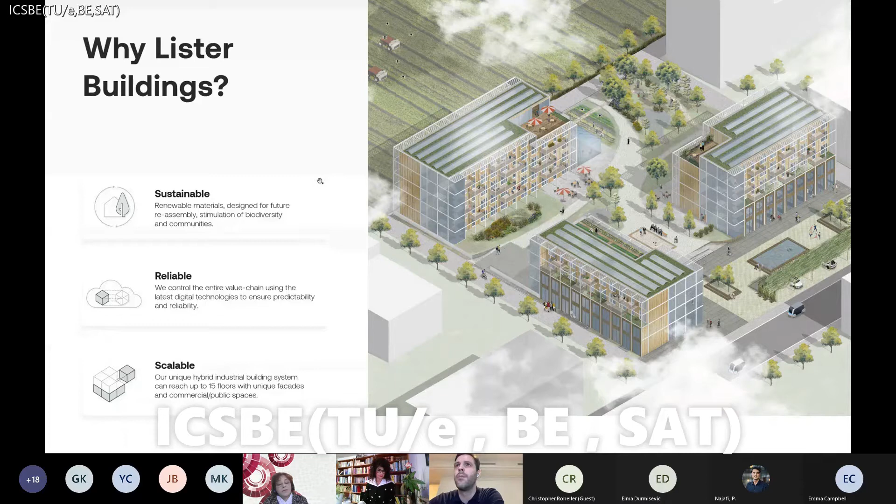We are part of the Kubox Group, a family-owned business, quite old already, roughly 30 years, founded by my father. And we focus on multiple business units, some private equity, hospitality, leisure, R&D, light industrial, real estate, logistics, and hotels. And we do that in the Netherlands and Germany.

And 2 years ago, we founded Lister Buildings, most of all because we saw a growing demand for sustainable housing and housing in itself.

And that brings me to the most important challenges. So we see there's a direct need of 845,000 houses until 2030, but a limited construction capacity. Well, there's going to be some future changes in carbon emitting and towards the circular economy. And we have a growing need to stimulate biodiversity as well. So there's a lot of things changing on the climate perspective.

And we have quite an inefficient industry at the moment. On average, 20% of projects run over time and 80% over budget. So that sums up to: we need to build more houses that positively contribute to our climate, and a faster and more reliable construction process.

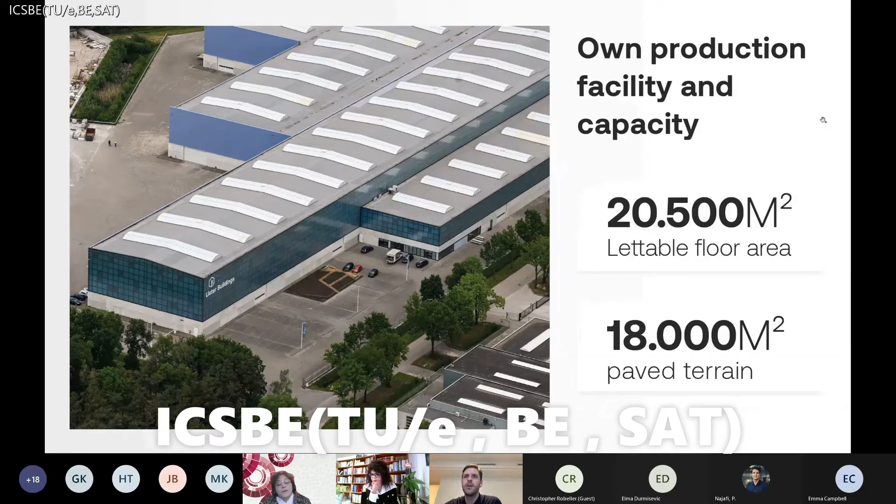We have our own production facility in Weert, 20,500 lettable square meters of lettable floor area, and a large terrain outside as well, 18,000 square meters. Here are a few pictures of the facility.

We created our own tiny forest in collaboration with the IVN, a Dutch foundation focused on nature education and bringing back biodiversity within cities. So we sacrificed a few parking spots in order to grow our own little forest next to the production facility.

We have quite the ambition. So for next year, we have 3 projects in the making. We'll start construction probably before summer. And by end of the year, we should have delivered our first 50 apartments distributed over 3 projects. In 2022 and 2023, we have roughly 900 apartments in the pipeline, and we're aiming for 1,000 apartments annual volume after 2024 and onwards, obviously.

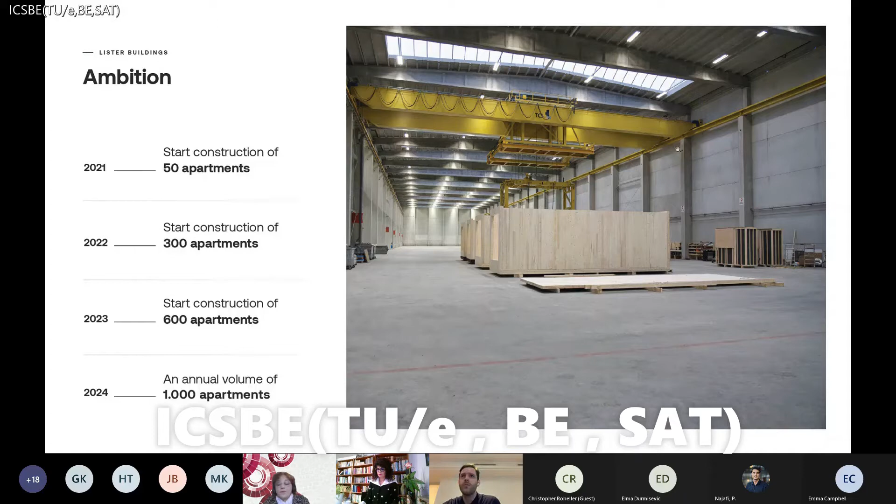Well, first a little bit more about our Lister platform. We're trying to act and operate as one platform and become one solution for the complete life cycle of residential real estate. We aim for complete integration and digitalization of the entire real estate value chain, from design to development and from production to property management.

Schematically, I think it looks like this for our Lister platform, because we see that at the moment, every project is uniquely approached with unique team members, and every time, every project is approached with new team members and with different systematics and different requirements.

We're trying to come up with a system where everyone works closely together over a sustained period of time. So we are really focusing on gaining productivity within the complete value chain of real estate, because 70% of the productivity is lost by sharing and working with the wrong information and lost information within this mess of stakeholders, the big amount of stakeholders involved in the whole process.

Our current partners, brief overview. Most important, I think, CPZ, Pieters Bouwtechniek, and also CLTS and Stora Enso. Stora Enso and CLTS are working closely together in the Belgium and Dutch market, providing and supplying mass timber solutions, entire solutions from design to on-site assembly, and obviously the TUE, which we're currently helping assist in the research to circular buildings.

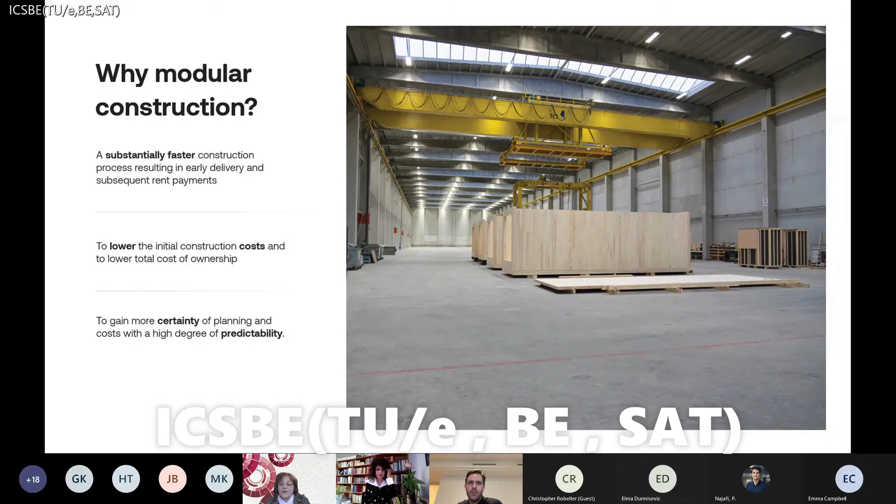So why modular construction? We see a substantially faster way of constructing, and the process results in early delivery and obviously subsequent rent payments. We lower initial construction costs and total cost of ownership. We gain more certainty of planning and costs within a high degree of predictability.

We tend to improve overall quality and lower to zero fail costs. We have increased flexibility in design and increased options for disassembly and reassembly, and less nuisance on the construction site and direct environment with less transportation.

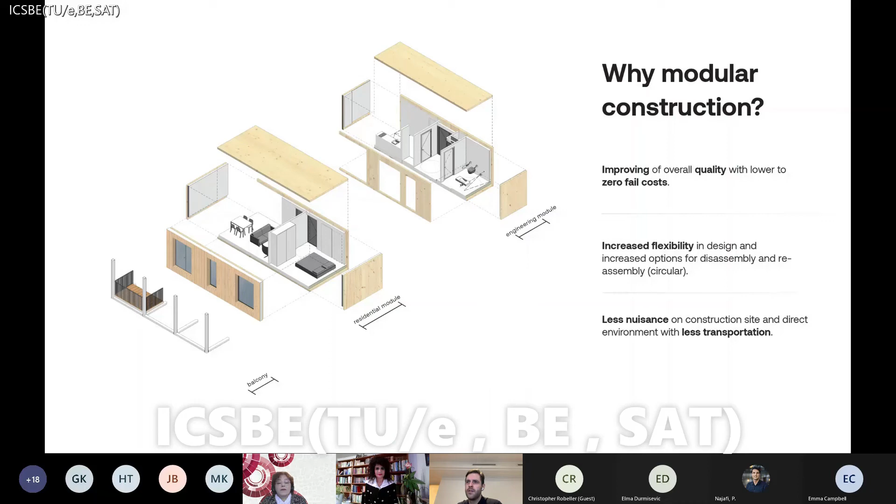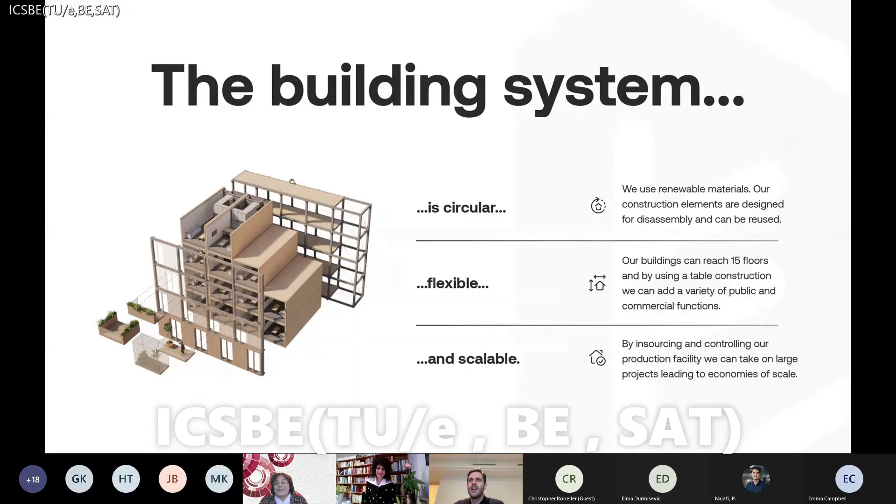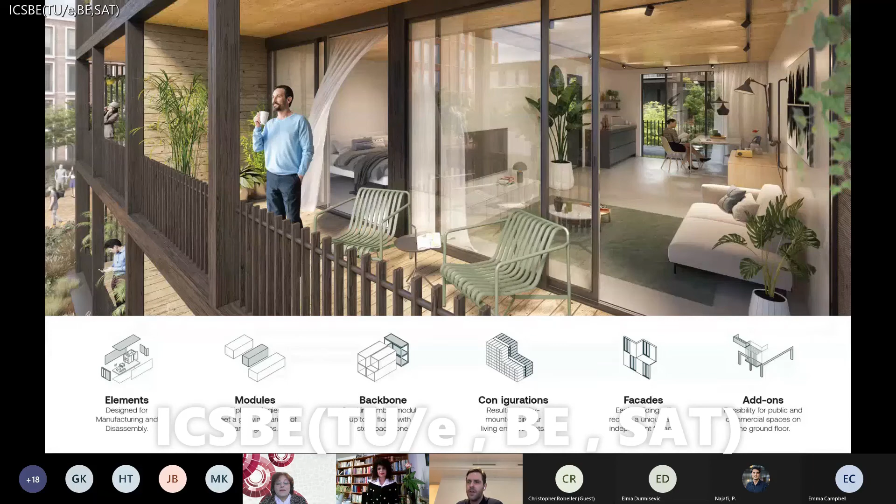Okay, so our building system consists of elements, modules, a steel and timber hybrid backbone. We can assemble these in multiple configurations, all dry mounted into circular living environments with unique facades and the possibility for add-ons for commercial and public spaces.

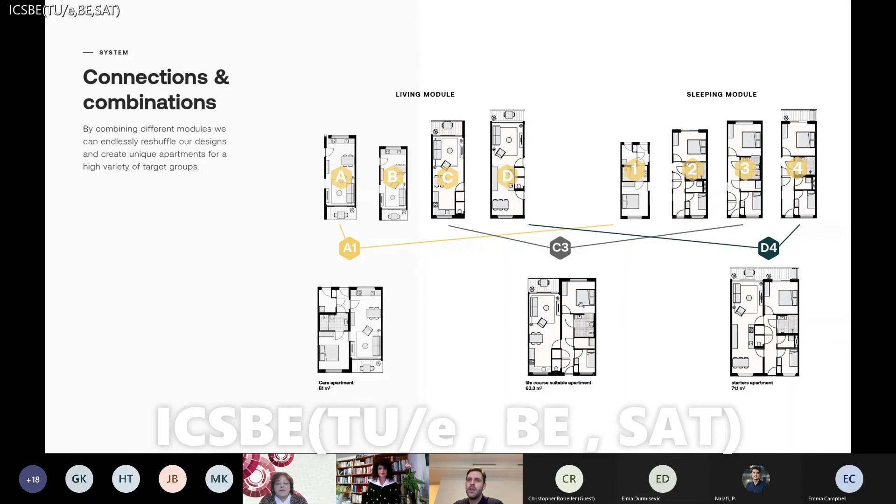I'll quickly go through this. We have different floor maps that we can parametrically design into all kinds of apartments for multiple target groups: students, starters, young professionals, seniors, housing and care, with community spaces on the ground floor. We try to do that for every building we develop.

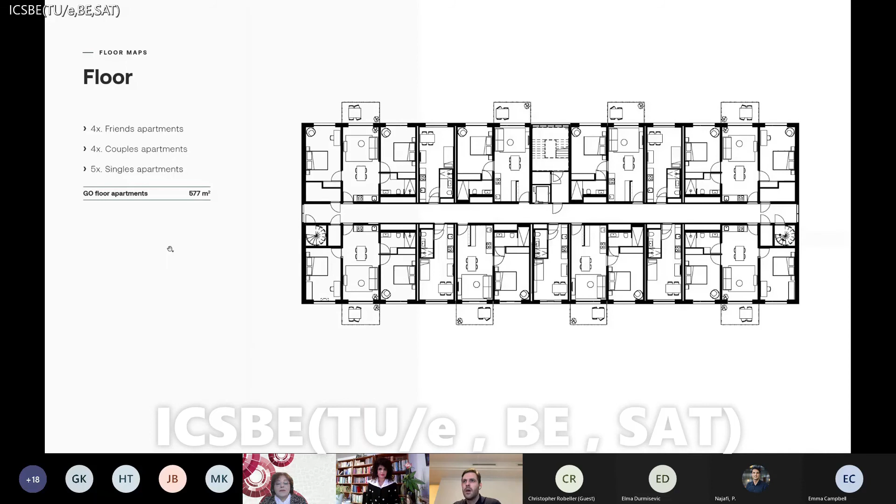We can fit multiple types of apartments within a building, so we can get a variety of target groups within a building. We work closely together with Delft, where we develop entire circular interior solutions, only based on bio-based materials with no more usage of glue or silicone sealants, all plug and play.

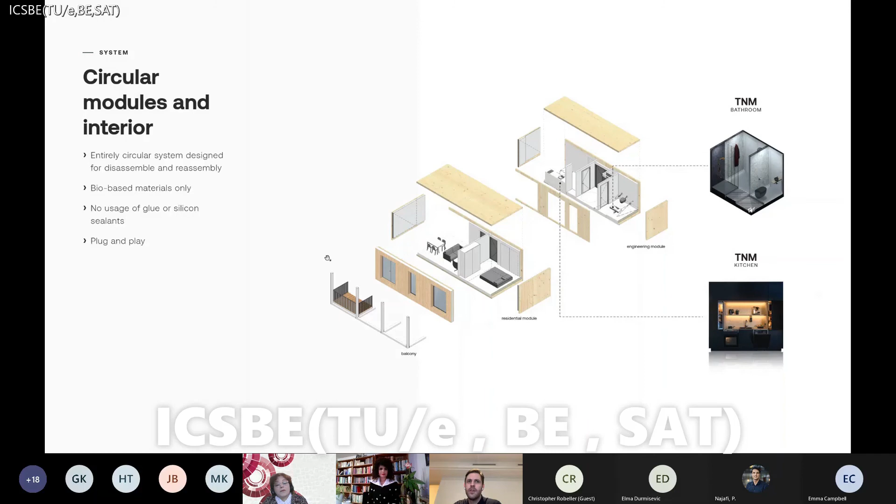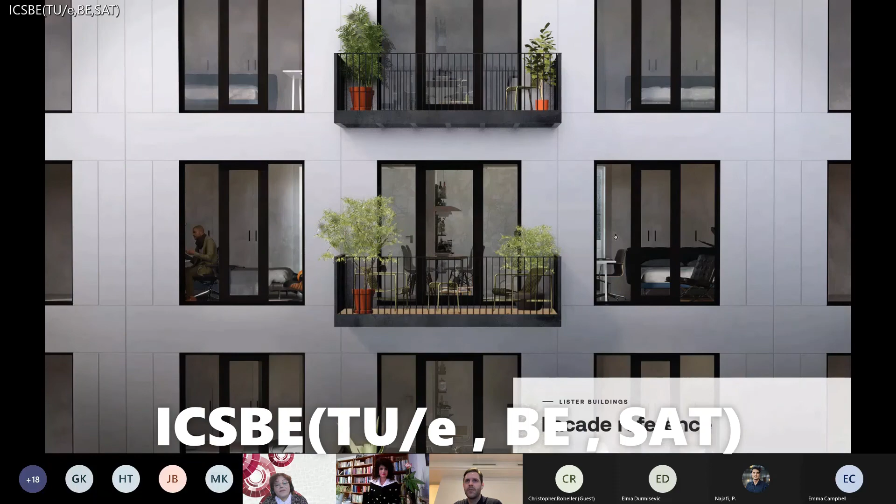Last but not least, there are a few impressions of how these apartments might look from the inside, in cross-section, with different facades possible, different varieties of greenery, balconies, and add-ons.

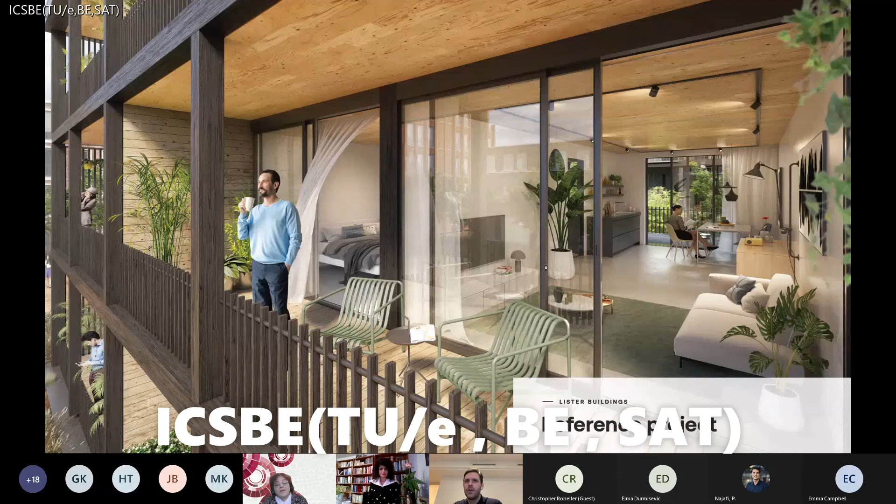And hopefully after one year we'll have a proof of concept, and we'll have further gained more future projects in our pipeline, trying to really change the way we approach the built environment.